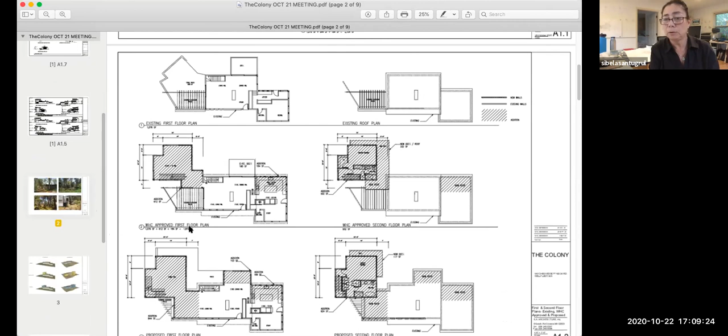From the existing house, if you could turn to sheet A1.2 showing the floor plans. I gave you, for comparison, the existing layout at the top. The middle is what the commission approved, and the bottom, called proposed, is what we're proposing right now. As you can see, in the approved plan the connection was only 36 inches wide, a pretty narrow connection. It's like a bottleneck, as Jeffrey and Mihai were saying, and they felt uncomfortable going through this very narrow space to get to the addition. That's how it all started. We also wanted to present what would be appropriate architecturally, not just in terms of ideal use, but architecture that's appropriate with the original intent of the structure.

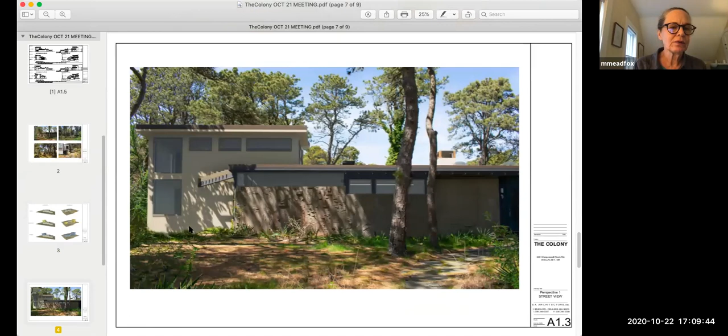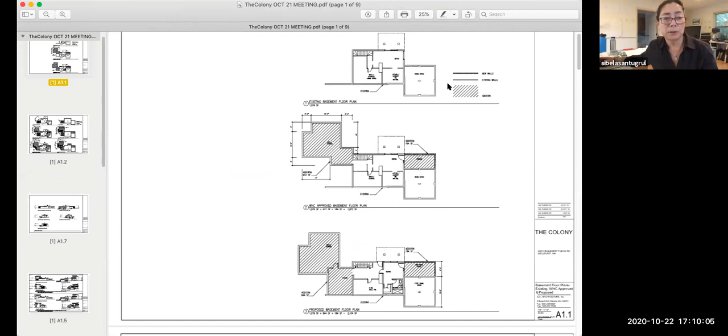Sibel, sorry, can I interrupt? We don't have what you're talking about on screen yet. Which one is it? It's A1.2. You should scroll up a little bit, please. A little more, go higher, one more above that. This is the top. Are you talking about the rendering or the plan? Go to the next sheet now. The next sheet down - this one? One more. This one. Whoops, you lost it. That's not where we're supposed to be, is it? We're supposed to be A1.2, the second sheet from the top. Yeah, that one. Exactly that one. Thank you.

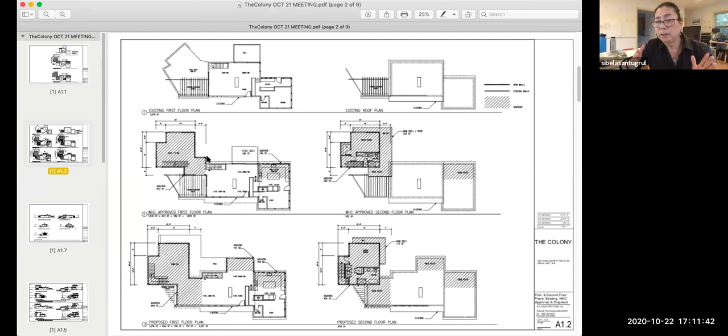In this drawing, the top shows the existing first floor plan and existing roof plan. The middle shows the Wellfleet Historic Commission approved first floor plan, roof plan, and second floor plan. The bottom is what we're asking you to review and approve now, where we took the approved plan and enlarged the renovation and addition. There's an increase in square footage of 385 square feet on the first floor, and the second floor is increased only by 122 square feet. The reason, as I said, is you can see in the approved first floor plan there's a little 3-foot, 36-inch wide connection from the old to the new, and that was the bottleneck we were trying to clean up, exactly right there.

So in looking at it, we thought that if we could take the existing patio that we were allowed in our last hearing to remove the pergola and vertical slats - that area is already within the footprint of the existing building, albeit it's a covered outdoor space - if we made that into an interior space as an extension of the existing living room, it stays within the original integrity of the design. It pushes the existing sliders out to the end of that wall with the sculpture on one side and the mural on the inside of the patio. That helps the interior layout of the living room so there's no bottleneck, because widening that 36 inches to 6 feet would make the patio an oddly narrow space. So we thought putting a roof over that sculpture wall and mural wall would actually preserve that wall, which is a major part of this structure. When you're on Chequesset Neck, that's what you really see very profoundly.

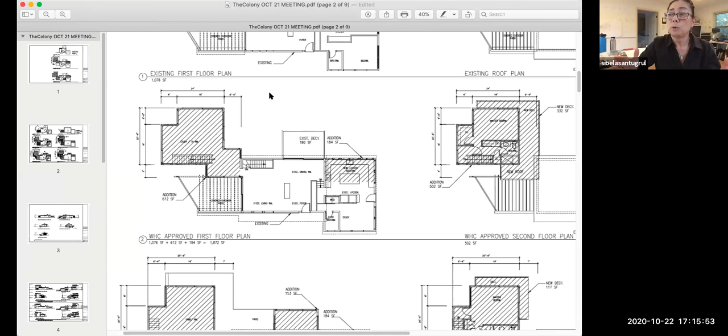Excuse me, Sibel - excuse me. Hey Lydia, can you move that up a little? I think she's going to talk about the bottom. Yeah, there - exactly, thank you.

So this part now is enclosed - the bottom left is enclosed, and the two corners. Is that 36 inches, about 3 feet, going into that addition? So the 36-inch bottleneck - now you have a good flow, and the spaces make sense. And that's all enclosed, with a roof.

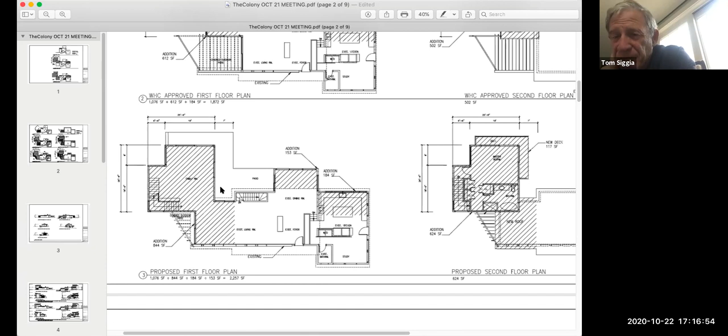So the existing roof line would come straight out at the same plane and create a roof over that patio. That's the part that we are proposing as something new to what you approved.

The second area we are looking to build out also has to do with the functioning and use of the house. On the garden side there's a balcony, a deck, that really needs to be rebuilt because one of the posts is rotting, so structurally it's unsafe. Also the guardrails are not up to code. When you do a project of this extent, the Massachusetts building code kicks in and you have to bring things up to compliance, safety especially.

So that existing deck has to be renovated anyway - it cannot remain as is. What we're proposing is that we take that existing deck, bump it out, and make it into an interior space, which would be an extension of the space currently used as a dining room.

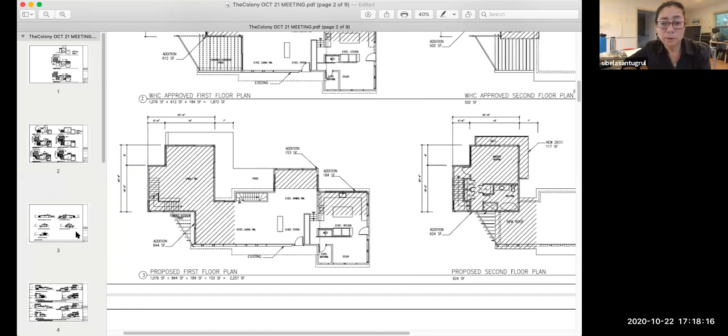If you could please scroll down further, I could show you the 3D volumetric drawings that I submitted. These are the exterior elevations and they explain the materials, etc. But in terms of understanding the three-dimensional aspect of the whole design...

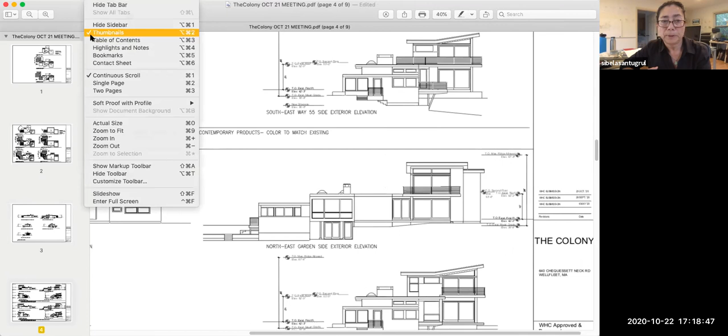Yes, go scroll all the way down, please. Okay, the colored ones right here - so these are the... okay, that's a good one, we could keep that. So this drawing - oops, too big, sorry, one moment, I'm going to change that.

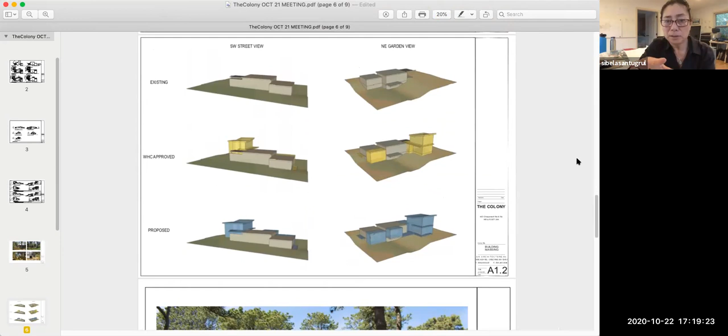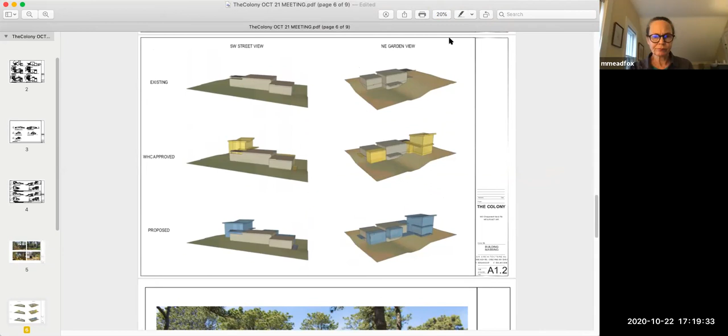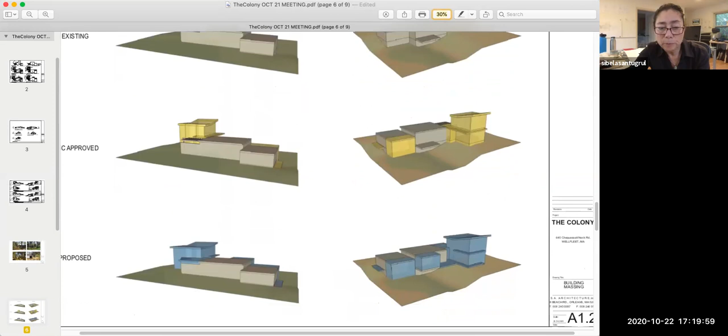Okay, so in this drawing, what we tried to show is the first two is the existing street view and the garden side. The middle part where you see the yellow volumes, those are the new additions, and that's what you approved. If you scroll down please, to the blue, what you see in the bottom part is what's proposed. So the blue area is what we're proposing now as compared to what you approved.

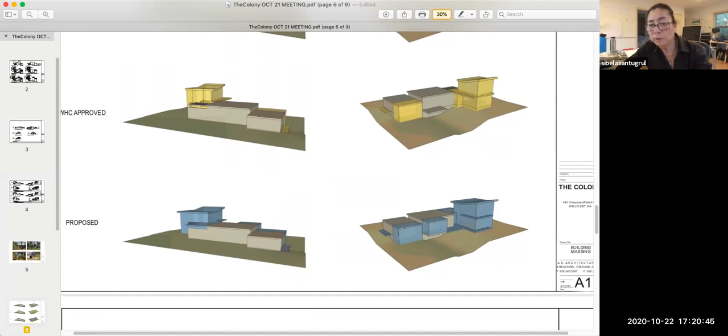So from the street side, you're really not going to see much different look as from what you approved. Other than that, you will see that the existing roof line is extending out over the existing patio, and we would still have a lot of glass so that it's all transparent and it becomes interior living room space. And then the garden view is where you see in blue what we're proposing to add on, which is right over the existing deck.

So what we were also trying to see is, does it make sense to build then a pergola? Because there is a pergola right now, although we had proposed that we would remove that and you approved that we remove it. We were thinking that if we were to build a pergola there, that would be in keeping with what is visually seen right now, where there's beautiful wisteria growing over it, and it becomes a visual connection to what it is currently. So either we could build that as a pergola, or the existing roof line could come out at the same angle and create a solid roof over that area, which also allows shadow into the living room and protects that glass.

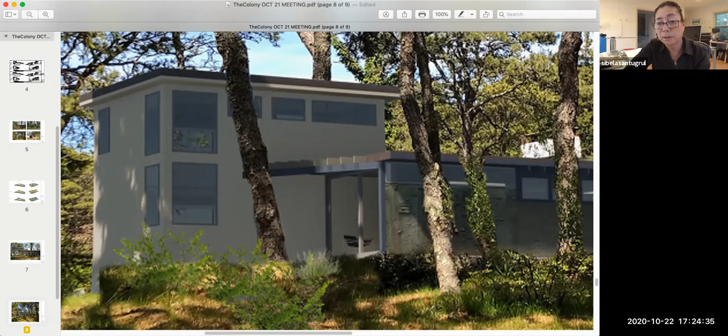So from this view, the only thing you will see different is that instead of being totally open to the air, the area where the existing patio was becomes an interior space with glass, total glass. And you see the seating inside. And the next one please, if you could scroll down.

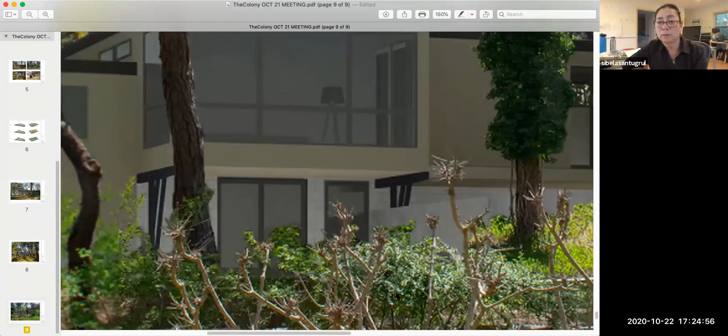Okay, so this side shows us the garden side. And the garden is a big feature of this property. And from this side, the addition that you already approved, which was the kitchen addition, is what you see on the left side. So that part is what you approved, and it hasn't changed.

In the middle is where I referenced that existing deck, where the two posts—one of them is really in bad shape and needs to be replaced. So that's the area where we took the volume, the existing deck, and made that into an interior space, part of the dining room inside. It creates an overhang over the lower floor, similar to what it does now, but instead of a deck, it's this volume that's all glassed in.

And then to the right is our two-story addition, almost the same as what you approved. So from the back, what's also nice is that between the existing building and the two-story addition, you see that glass sky, the sliders. That's the area I was referencing to before. It creates this void between the old and the new, and it also visually connects the garden to the living room space.

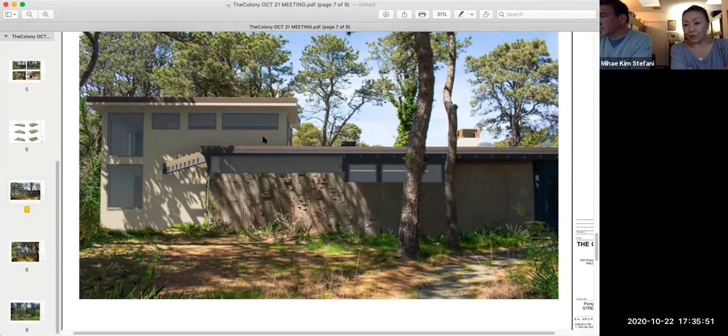However, if you look at the front of the house again, you'll see the majority of it is in the beige tone, and the only thing we have blue is the door. That is what we're trying to maintain and keep. And again, this is not the colony—this is our home, and we have to keep the colony of Wellfleet and this house completely separate. Colony is a business, an incorporation of its own, and this is our house. Thank you.

I think all the property is eligible or listed on the National Register. I beg your pardon? We are registered? I don't believe we're registered. So we're not—it's eligible for listing on the National Register, I think, as a whole part of this building and the others. It was not ever approved to be on the National Register, so right now, as we stand, it's not. I believe all the paperwork was done to make it eligible, and it was deemed eligible, but it's not on the list.

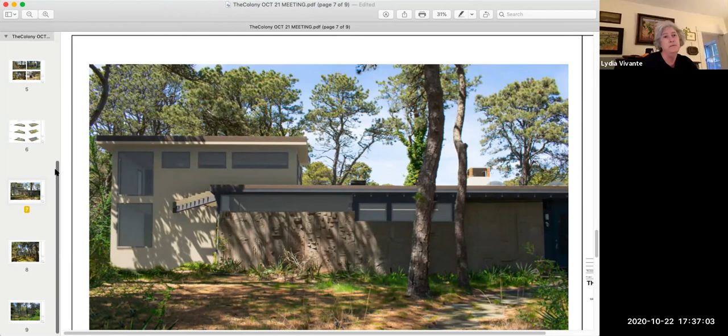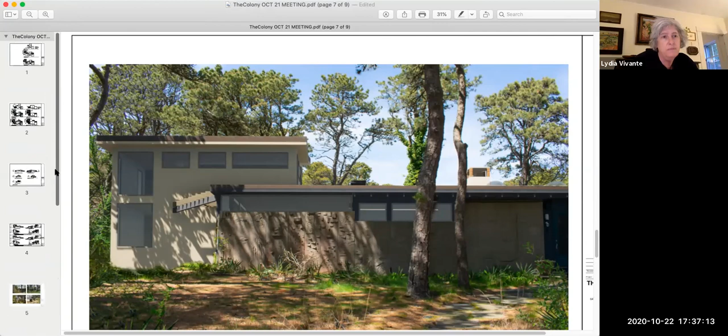And it's also, if I could remind you, this building is less than 75 years old. Our bylaw allows for buildings 75 years old and older to be deemed historic, and the Cape Cod Modern houses fall into that category. And because this is deemed eligible, that does give preservation some weight.

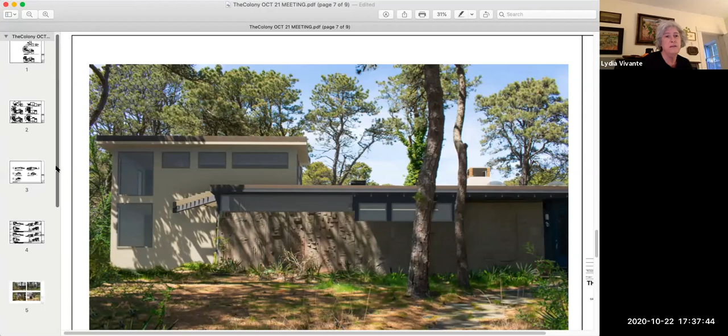The thing about the color, I feel, is something that could change down the road. I'm less concerned about the color than I am with losing some of the open space on the other side of the house. Also, if I may add, the color, as we're talking, is nothing different than what you approved before. Previously, what you approved, we didn't change—whether it's the windows, door materials, the roof materials—that's all as you approved. Yes.

I think, my theory is that this color, this kind of taupe color, is meant to mimic stone. You're breaking up a little bit—I wonder if your Wi-Fi is working as it should, because it's hard to hear you. I'm doing the best I can. I think when we speak at the same time, that tends to garble it. So what I was saying is, I think the taupe color, or this brown or beige, is meant to mimic stone, like sandstone, and that's why it's so flat. Also why they used the plywood or boards without any overlap—they wanted it to look like one continuous surface. I believe stone, but maybe you mean stucco? Yeah, stucco, I would think. Well, anyway, that's neither here nor there.

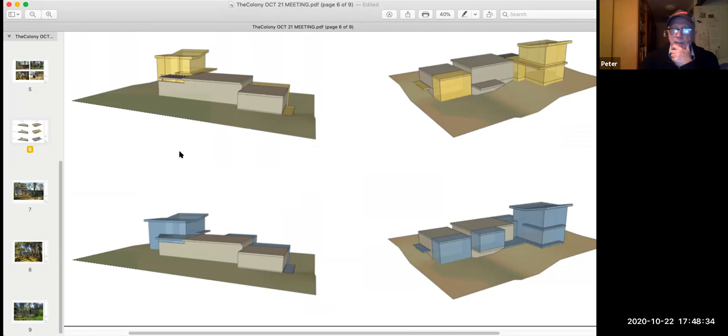I just have one comment, which is that I kind of get the alterations on the garden side, they're sort of keeping in the vocabulary of the existing building, although they're blurring the lines between old and new. I think the most aggressive thing is the enclosing of that deck, because it's breaking the plane of the building and it's sticking out.

I think you can see it in the rendering. It goes volumetrically with the new construction, but it doesn't relate. As I said previously, the whole garden side of the building has very little of the original intact, because you have the kitchen bump out on the left, the dining room bumped out, the connector piece and the addition, and even around the corner.

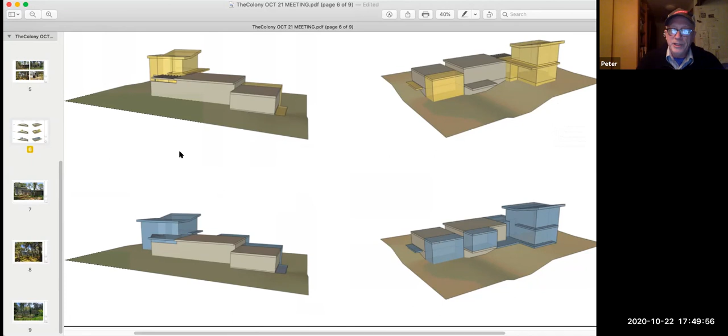But as far as the volume goes, I think that's the most radical. I think you can see it on the photograph page, the bottom left photo of the side of the existing, if you go to page 5.

Is this the photo? Page 5 of the PDF. Is this page 5, Peter? Yes, that's it, the bottom right photo.

Where the deck is, that will project all the way out to the end, it's a kind of... If I could, please — Peter, it doesn't extend all the way out to the end, actually, it's smaller by 4 feet. Oh okay, so how far does it stick out?

So wherever you see the existing, it sticks less out — it's 4 feet smaller in width. Is it 8 feet or 10 feet? Let me see, I'll give you the dimensions.

So right now, that deck sticks out 11 feet. Our proposal to build over that deck is 8 feet.

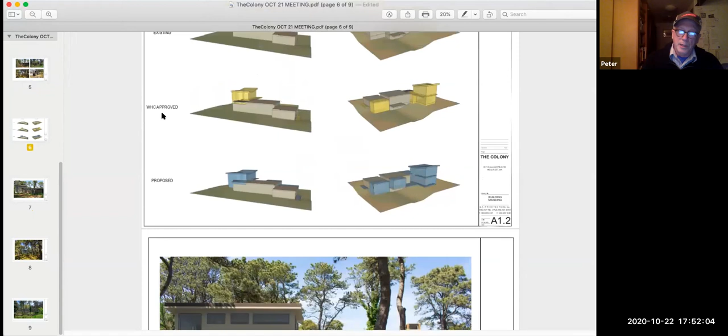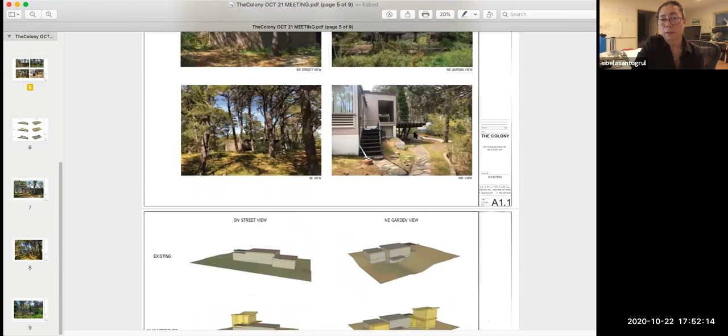Well actually, I would disagree with that — the old building is there in its form inside. Yes, we are adding out and jutting it out over the deck, but this is where the discussion could also lead: old buildings, historic buildings, we have to respect them, but also allow for changes and growth. It's just the way that it is. And as long as it's done in a respectful way, on the inside and the exterior walls, really the house is intact.

There's no part of the house that we're taking and demolishing and removing. The deck, we're going to take out because it's falling down anyway, and we're going to replace it in a different format. But the concept is still there — it's a way of really taking the old but respectfully adding to it.

Can we see the rear elevation again with the proposed new? That's already proposed and approved? That's sheet 4.

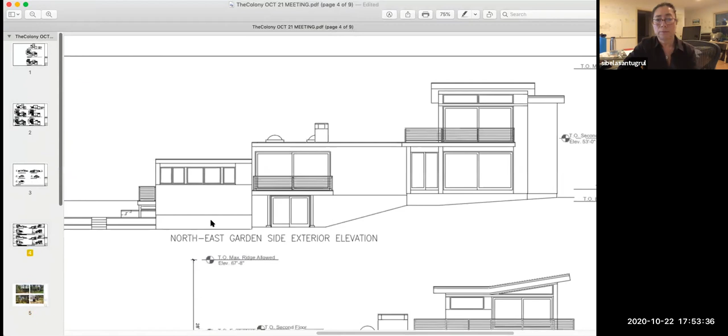But the one that was in blue and yellow, is that... Okay, this one. That makes the most visual sense to me. Okay, and that's Luke speaking.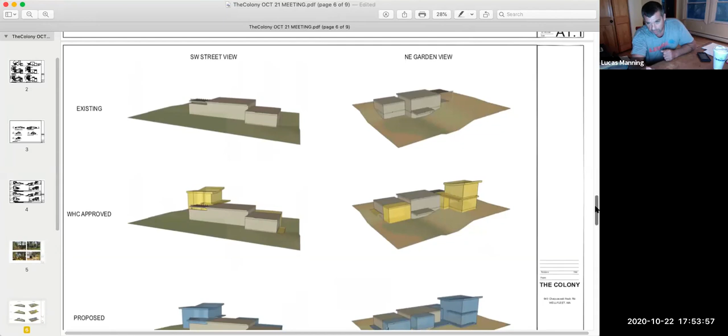I'm just thinking that what was already approved in yellow in the middle diagram, the rear elevation, almost takes away - I realize it's already approved - but to me it almost takes away some of the dimensions of the rear of the house, how it plays in and out, and you almost regain that in what's being proposed tonight with enclosing that rear deck. I realize it kind of ends up changing the whole back of the house, but I think in what we already approved, we're kind of losing some of the dimension and how it's almost one continuous wall across the back of the house, and then you almost regain some of that in what's being proposed.

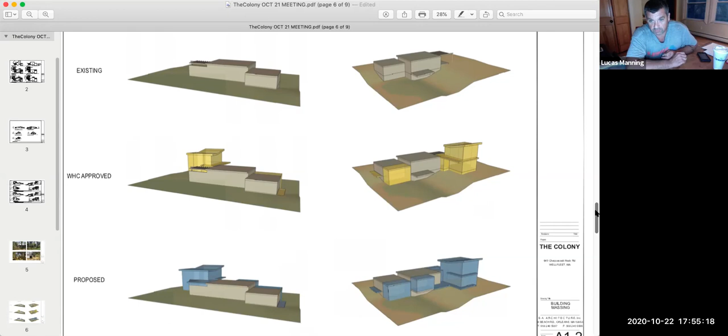I also think that we already approved what's, in my opinion, the biggest change in the overall building. I realize it's a significant piece of architecture, and I think Peter obviously has the most knowledge in regards to that style of architecture, and I'll listen to any of his recommendations. But it just seems to me that the most significant changes have already been approved from what I'm seeing, and the front of the building really remains close to the same.

This is Lydia. I feel like we could approve the enclosure of the patio with the mural, and that will be a big change, and so will the addition to the kitchen. We've already approved the addition to the kitchen and the main addition. We could approve the patio addition and hold off on this deck enclosure. It feels less intrusive, and down the road when you're living there with all the new additions, you might welcome that deck space not being enclosed - you might enjoy it more that way.

So I would try - we've already approved a whole lot with this major addition, the change to the existing kitchen area. I do appreciate that it was designed as a gallery and not as a residence, and it's great that you do plan to make this your home. But I think if you go slowly, it would be better. That's the way I feel about it.

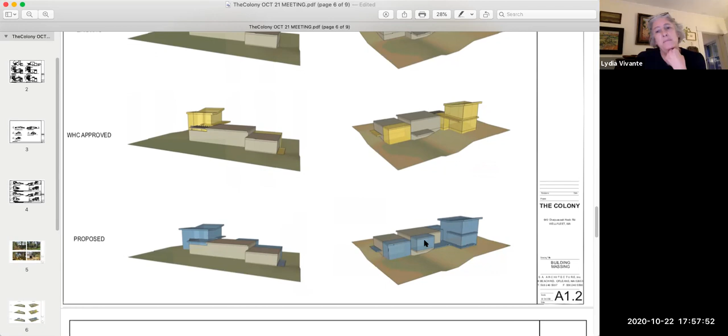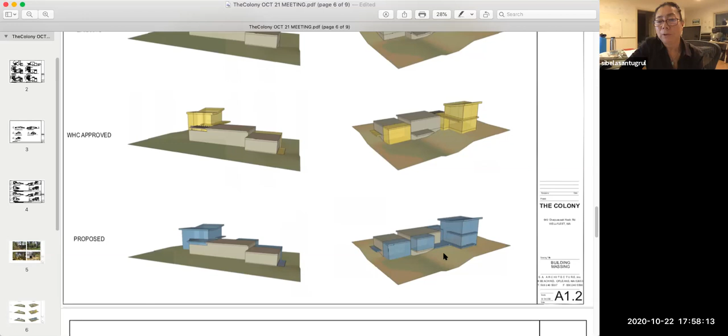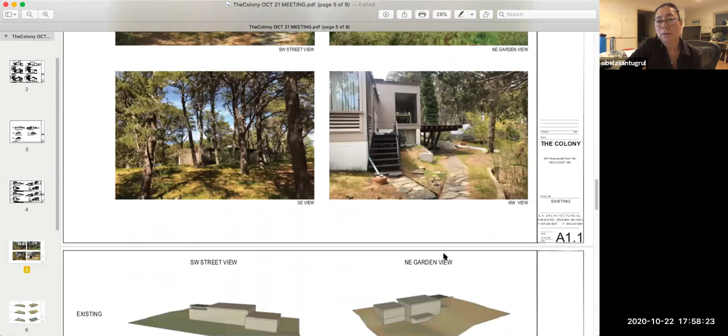Thank you. It seems to me, by having this blue drawing on the bottom, these look like they're on the same plane, the windows, and it has more of a corporate feel than a house to me. But if you go to the exterior elevations, which aren't just boxed out but show you where the windows and doors are, there's a continuation. So that would be sheet number 4, the bottom one, which is the one we're talking about now.

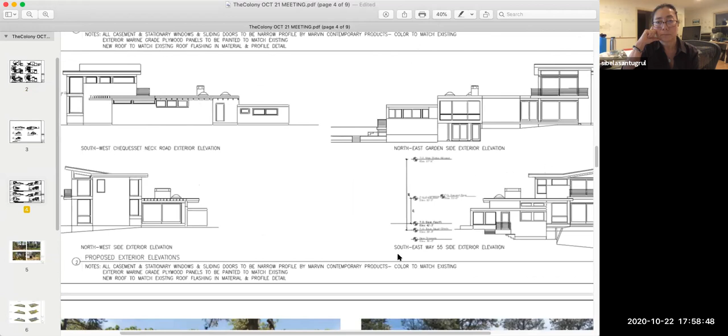Are we in the right place, Sibel? Yes, you are, exactly there. So you'll see that in terms of the horizontality of the window heads and door heads, they're in keeping with what's there right now, so there is a continuity, in other words. These are all good comments, because absolutely, when you add on and renovate and rehab an existing structure, you want to really do it right.

I guess I'm confused as I look at this compared to the other drawing where the blue and yellow were, because it did look as though there were two blue boxes extending from the kitchen area and from the dining room area, and I can't tell where those are on the lower right drawing.

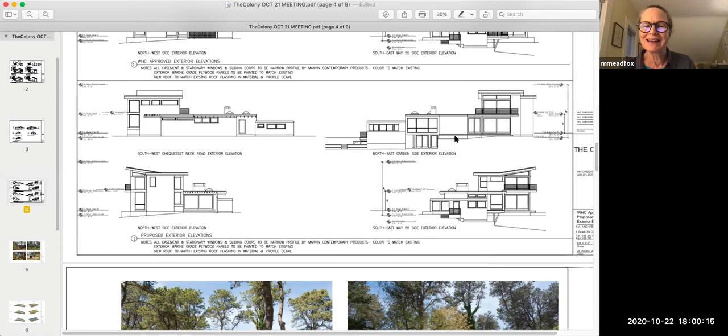Okay, so if you look at the northeast garden side exterior elevation - sorry, whoever that is. I'm so sorry, that was me. Oh, okay, you can't hear yourself. Okay thanks. So yes, I'm looking at the northeast garden side exterior elevation. Correct. There you will see that on the bottom left, that's the area that is the kitchen, and we bumped that out. Okay, so that's the one you approved previously. Right, and the area we're discussing is to the right of that, above the two posts. Oh, I see, yeah.

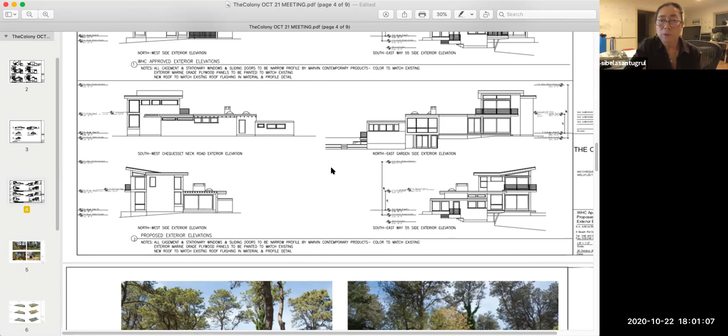Okay, and do we have a drawing of what it would look like if we didn't do that part? If you didn't do the part of the dining room, you mean?

Yes. So if you go up to the one that was approved by the commission, you'll see where the decks are, the railings. Stay on sheet number 4, the northeast garden side exterior elevation, that's what was approved. There you'll see a big slider and the railings. Those would have to be new railings put up there. Okay, thank you.

I think it's a little easier to see on the building massing drawing, with the blue and the yellow. But...

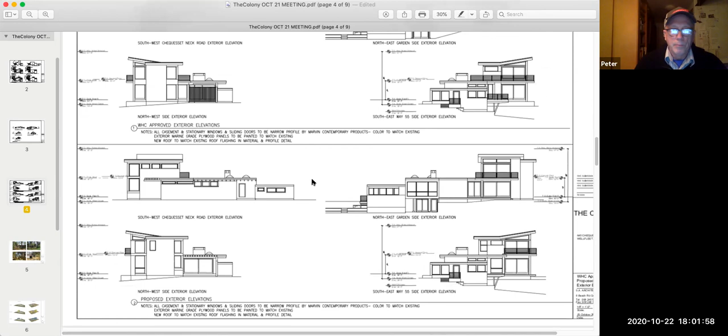So I guess, number one, I really appreciate all of the care that the three of you have put into trying to find a design that will increase your living space and honor the original building. I have two concerns. One is about that wall that has the bas-relief on one side and the mural on the other side. I wonder if it's going to become now an exterior wall of an enclosed space, how it will be possible to truly preserve it. It seems risky to have it be an exterior wall. And how are you going to deal with insulation, for example, on a wall like that that has art on both sides?

Very good question. So we have been talking to builders and we looked into that. We don't want to damage it in any way, and we don't want to remove it and replace it. So what we would have to do is build a foundation wall underneath it, very carefully. For insulation, it's concrete block right now, so we would fill the concrete block inside with insulation. Plus, as it is right now, that same wall is an interior wall, so that same concrete block wall that's outside is actually the same thing inside in the living room. So if it works there, it should work outside as well. That's where one has to really appreciate what Jeffrey and Mihai are trying to do, because this is not an inexpensive solution.

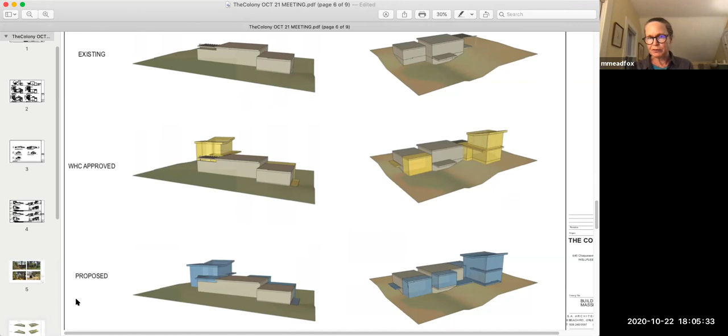I don't know how other members of the commission feel about that. I guess, Lucas, it seemed like you were okay with going with that part.

Well, I think that the more that's approved, the further away it gets from its original form. But I don't see that back deck turning into an enclosed portion of the house as taking away from the back elevation of the house, personally. But like I said, on the other hand, of course the more that's changed, the further away from the original form the house gets. But I still think the addition that's approved is the most drastic change we've talked about.

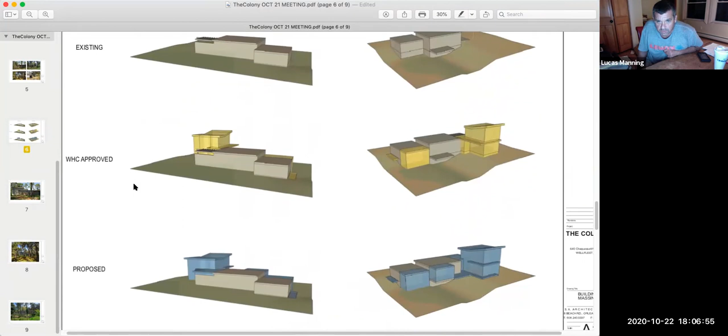I kind of missed something in between the addition and the original structure in the back. It looked like you're taking away some space from that inside corner, from what was approved in yellow—there's kind of an outside corner. Then in the bottom diagram, it almost looks like it becomes an inside corner, with less room. There's a deck that connects the two, and the addition and the proposed new deck would become part of the interior.

That may be something I missed, but it almost looks like you're taking away some interior square footage there. Yes, Lucas, you're totally right. In the approved plan, shown in yellow, I was touching the existing building by adding a bump out from its face. Whereas what we're proposing now is that I took that away and I'm bumping it in, so the corner of the existing building shows, whereas before it didn't.

In the diagram showing what we approved for the back of the house, is that one plane straight across from the left-hand side of the deck where it turns into the yellow proposed addition? Is that just a flat wall with no jog in it at all? Correct, that's the same plane just carried out. Where the existing building is, the middle portion, I pushed that out, so it's one plane across with no differentiation. So, to me, the more changes that are made, the more of the original building is altered or changed.

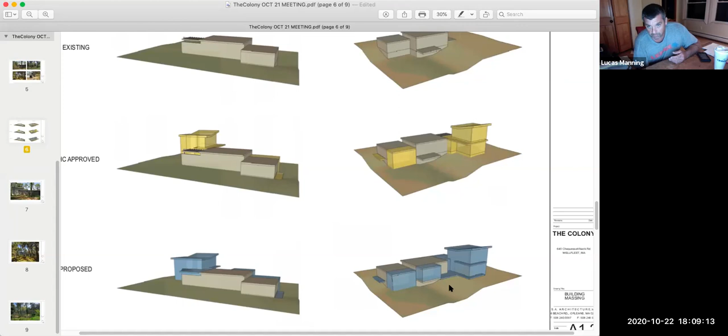Lydia, could you move it down a little bit so we can see what the original structure was like? No, the other way. Stop. Can you move it up so we can see both the top and the bottom of that frame? Yeah, a little bit more. Stop, thank you. So this is what you're referring to, the top versus the bottom?

Well, the very top, the way that the far left-hand portion of the building is jogged back towards the road, and then with what we already approved, it turns that into one flat wall, with no jog at all, it just carries right straight through. I hear what you're saying. And then in the far bottom, you kind of regain more of the same look, although more of the building's altered and you're getting further away from the original structure, you are getting closer to mimicking the look of the original structure by introducing that jog again. That's a good point.

I guess the question is, where do you stop then? If you just keep jogging, you know? I feel comfortable with approving the patio enclosure, but not comfortable with the dining room addition at this point. I am quite torn about this.

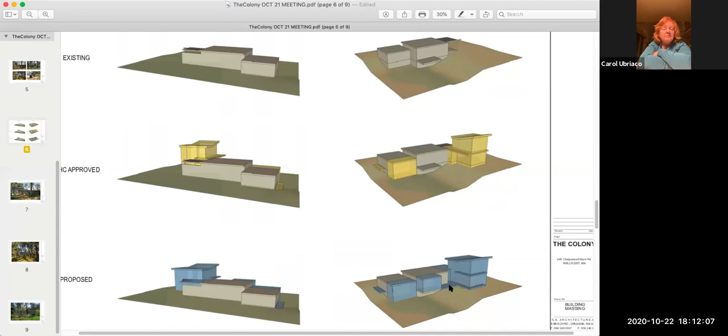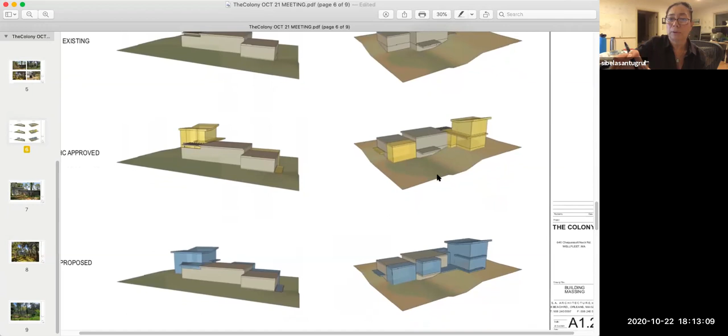If you think of the facade in the blue, you'll have glass, glass, glass, a lot of reflection. In the yellow version, it'll be quite different visually because the original facade is there, and you also get the original proportions and scale. But actually, Lydia, if I may, the glass, as you said, mimics what's there in what was approved. So that same glass is pulled out. What you see there is just massing, so you don't see the glass, but where we would propose the glass to be is the same width as it is right now on the existing plane. So the glass amount is the same, other than from the sides, you could say.

Can we move to the renderings of what it would actually look like in real life? Those were very useful, by the way, Sibel. Thank you for doing those. You're most welcome. And I have to say thank you to Jeffrey and Mihei, because these cost a lot of money and time. Thank you, Jeffrey and Mihei, because you are very helpful, extremely helpful.

Can I make one comment?

Of course. I guess, yes, I totally agree, it's so much easier to understand with the renderings especially, and the volumetric massing drawings. This is a really good precedent for a presentation for a project like this, because it's very clear, and it's a great way to understand what's on the table.

One thing about the dining that bothers me is that it's a cantilevered box that doesn't have a base under it, which seems like a break with the vocabulary. It seems to go with the addition, but it's a real break from the existing building, which is slightly shifting boxes that are on the ground. This is an upper level volume sticking out with nothing under it. I understand the comment about reintroducing the stepping of the back facade, but it's very different than the two-story stepping — it seems like kind of an intrusion out into the, I guess, break with the vocabulary of the existing building.

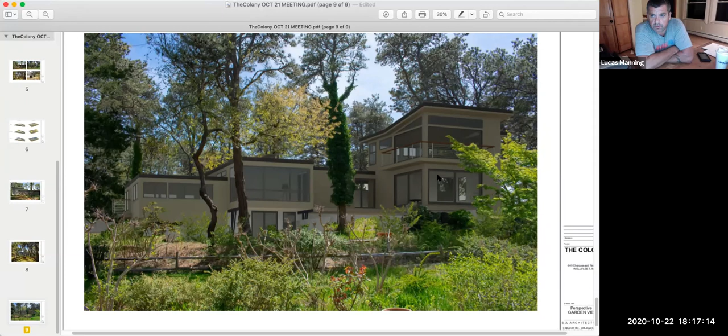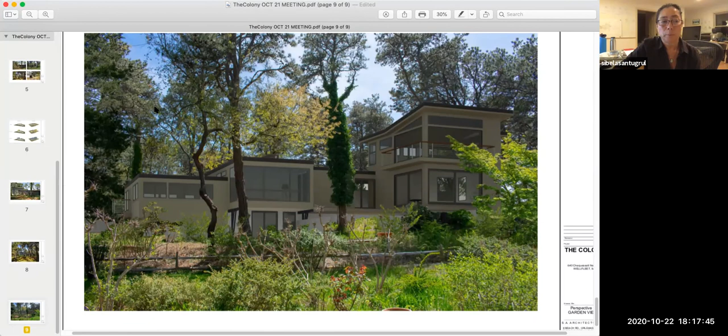I'm sorry — the deck that's existing now, and failing, is it truly cantilevered? There's no posts? No, there's two posts — one of them has a diagonal. I don't know if there's a close-up, but what you see right there, where you're pointing to right now, right there, black — it's like that, but set farther in from the corners, not as spanned out. I think also it appears here, you can see it — those are the posts.

Just wondering — if you go to the existing photos, I believe it shows there. Which number? Oh, you have it, right there, at the bottom right. So if you rebuilt the deck without extending the dining room, it actually looks like the joists are running in the opposite direction, so it's not really cantilevered at all — it's structured on posts and footings of some sort. Correct, correct. Well, so about half of it is cantilevered.

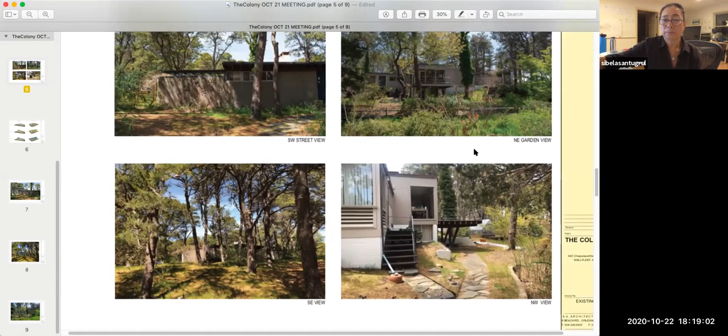Now I was just wondering, because if it's failing and it was going to be cantilevered, that would mean you'd be basically replacing the whole floor system anyway to some degree to get two-thirds of a span inside the room. Correct, you're absolutely correct. The other idea we had looked into, and then didn't go in that direction, was an 8-foot wide bump out in the dining room, and the remaining 3 to 4 feet we could do a deck so that from the garden side you still see horizontal railings and a deck as it is now with the bump out. We could also perhaps do a 6-foot bump out with a larger, 5-foot deck with the railing, so it would look similar to what's there, but with that play of volumes and planes going in and out.

I'm feeling more like Carol now in terms of mixed feelings, because I agree with Lucas about honoring the ins and outs of the back side. And then I'm also concerned about how much we're losing of the original building. It's a tough decision. I am very torn.

Because I must say, Sibel, I like your design. I think it's a really interesting, attractive design. And the challenge is honoring the work we're supposed to be doing in the Historical Commission and honoring the needs of this family to have the kind of building they want to live in, while respecting certain aspects of what the building has been.

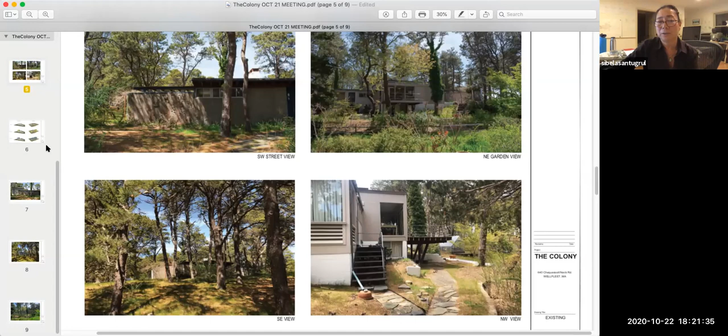Does it make any difference to us if it's 6 feet or 8 feet? I'm talking to the others on the commission. I'm not sure.

Luke, are you there? I'm here. Am I unmuted? I think so. Okay, you are unmuted. Would 6 feet make a significant difference rather than 8 feet here? You mean for the bump out of the building itself? Building, right - Sibel just offered 6 rather than 8.

The existing deck is more like 8 or more, isn't it? It's 11 feet right now. The 6 or 8 feet to me doesn't seem like it would make that huge of a difference, really. Okay, that's kind of what I was thinking too, but I'm not an expert in this.

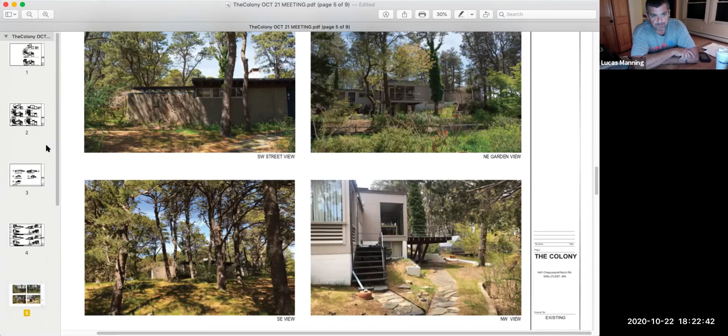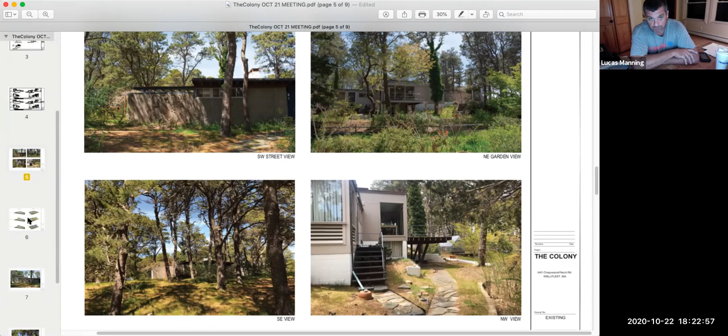When you look at the diagram showing just the mass of the existing building, I think it almost looks like a ranch on a hillside with a cantilever deck there. But obviously it's a significant piece of architecture. What I'm getting at is, if you just look at the mass with no detail, it's very different than when you take into consideration all the little things that make it what it is - the heavy copper drip edge and some of the louvered details under the windows. It's really in the details that set it apart from being ordinary. So I think a lot of honoring the building would be in preserving a lot of those details, even if it was in a new part of the house.

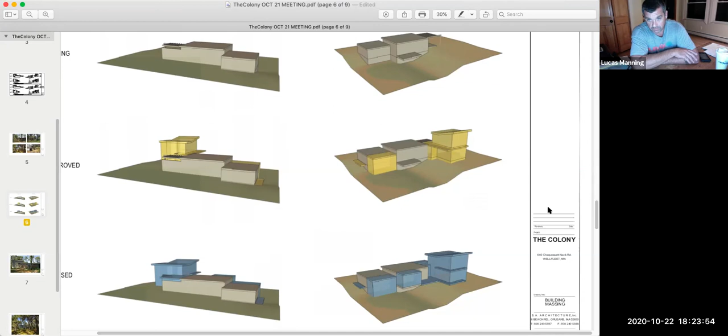Okay, you're totally right with that. I am in total agreement. Yep, I agree as well, yeah. The devil's in the details - the windows and all that.

Now, if I may ask, would you all prefer that we also add a deck outside of that bump out to the dining room? I personally don't need the deck there. I don't know if it would make it look more bulky and unbalanced, like too much hanging over. I'm not sure. Yeah, I worry about that too, Carol.

I think it would just go too far if the deck was bigger. I don't think that's really the point of what we're trying to say here. It's more about trying to preserve as much of the original building as possible, and the scale of it and angles of it and things like that - that's what we're fighting about. I don't think it's the size of the deck at all.

This is a little beside the point, but I'm just aware, in our lifestyle here in Wellfleet, how nice it is to eat meals outside. There's a part of me that feels it would really benefit you to keep that deck close to the kitchen and dining room, so you could spend all your time out there. We spend all of our time on our porch in the summer. Yeah, so do we - we eat all of our meals outdoors and it's absolutely wonderful.

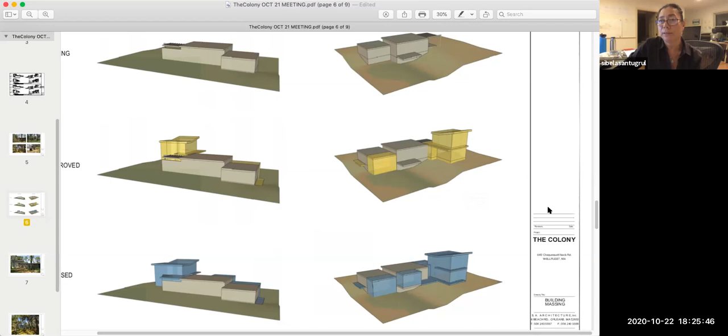Oh, may I just butt in a little bit? Because I think what we got a little lost is that if you look at the bump out of the dining room and the bump out of the new living room, between the space right there, there's a gray space.

Actually, it's just what we have right now, so we're going to try to use that as our outdoor space. We love to eat outside in the summer as well, so that's where we're thinking, because then we can still enjoy our beautiful garden. We can use that outdoor space, going out from the dining room to outside. So definitely we will enjoy our outdoor space here.

Good, so glad you'll have a place to do that. Thank you. Me too. We love it, we really, really do, being outdoor here. It's a gorgeous garden.

Okay, so Tom, did you want to say anything about this? I kind of agree with Luke and Carol. I've got to leave it up to the experts on this one. This is a very difficult decision.

So if we're saying we're going to leave it up to the experts, it seems like both Sarah and Peter were saying that they had concerns about the dining room bump out. I don't know if Sarah's still with us, but Peter, would you say that's a correct assessment? Yeah, I hate to be the fly in the ointment, but that is my opinion, yeah.

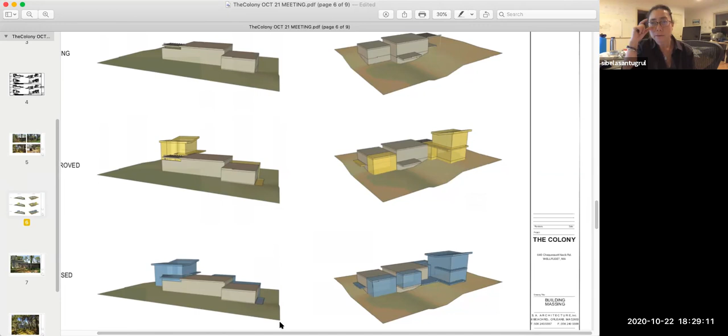I don't know if Mihae or Jeffrey has anything to say at this point. Thanks, Sibel. Not being in the same room, it's kind of difficult to get any input from my clients, in other words, and perhaps they could speak for themselves.

Thank you. We very much appreciate the deliberations that we've heard this evening. We understand, as well as you do, arguably more so, how difficult these decisions are in terms of establishing a balance between what to preserve and how to adapt this structure to a lifestyle and to our needs. And so yes, there's absolutely trade-offs that we have to make. We understand the argument about the visual diversity of the garden side of the house. We considered that as well.

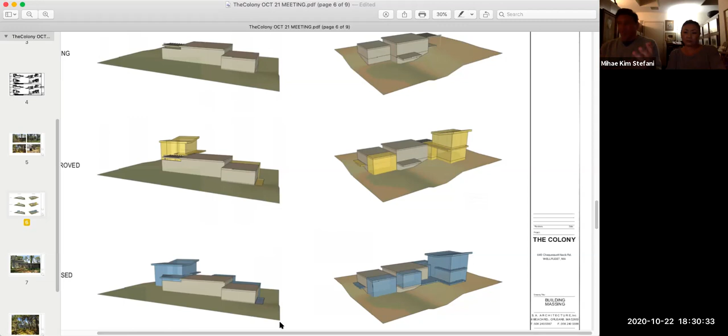That's why we talked to Sibel about whether or not to have a small balcony outside of the proposed dining area, because currently when you walk in the front door, you take 3 steps and you're on top of the dining table. So we were hoping to have a little more space there. But you know, if that's the part that you believe is really critical to maintaining what Peter called the architectural vocabulary, then so be it.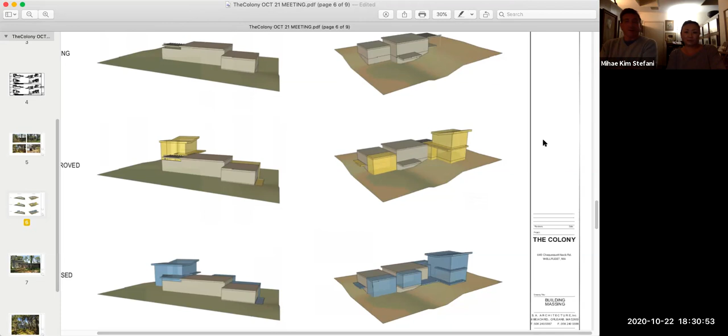Anyway, thank you all for your work on this and the time and all you've put into it. We appreciate it. Thank you very much.

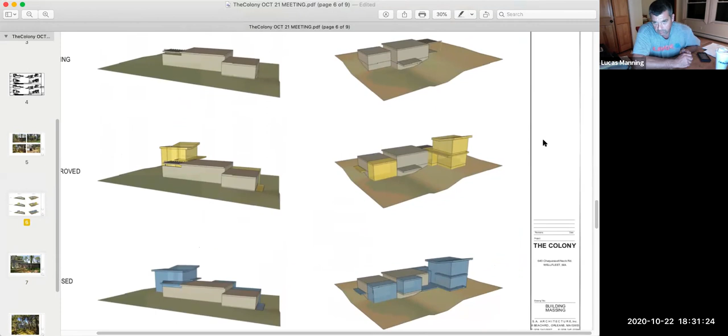I think what Sarah suggested makes sense, to try to maintain the back portion of the house, the original back portion as is, and maybe be open to, if they're willing to put more work in, and if they'd like to see a change in what was already approved, to change the addition rather than the existing structure.

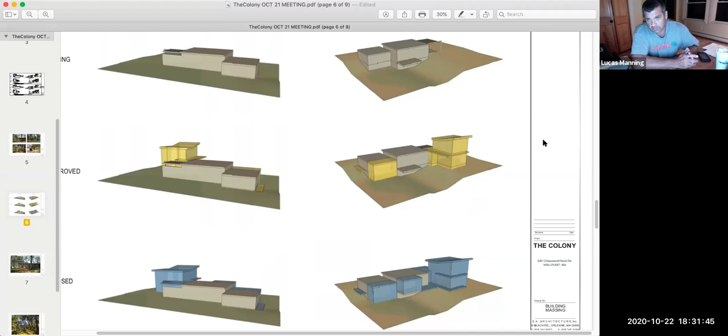And so I wonder if the motion might be something like moving to... I'm not even sure how to put this, but to add to the original aspects that we approved, the back addition where there will be a roof over the mural. That was not well put. Anybody want to work on the wording there? The mural's in the front of the house. Yeah, in the front. I'm just looking at this diagram.

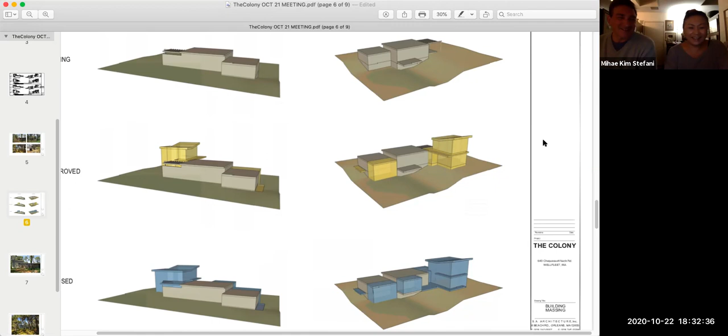Could I suggest: move to approve the patio enclosure? To approve the patio enclosure in the front, as presented. This is Sarah, may I make just a quick comment? I just want to point out that the proposal shown in blue on your plans, it does make other changes to the 2-story addition above and beyond enclosing that patio area.

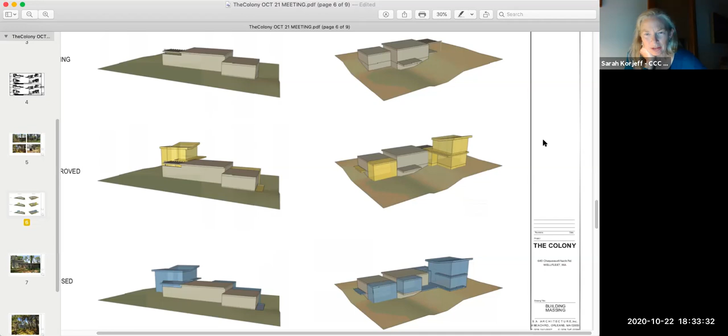So I think any motion you make, you would probably want to consider the entirety of what's shown in blue, and perhaps it would be easiest to just approve that plan minus the enclosure of the rear balcony. That is an excellent suggestion. Yeah, that makes sense to me.

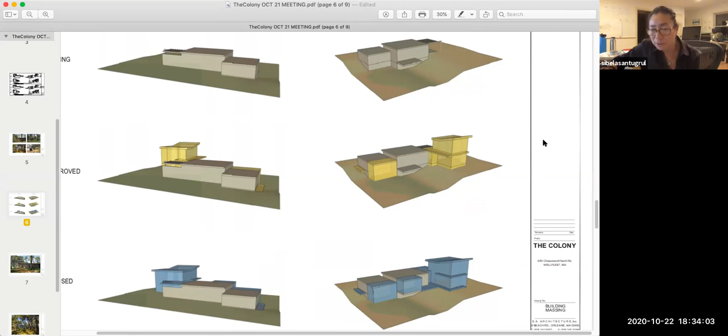How do we name this? So move to approve, what should we call that design, Sibel, that's on the bottom in blue? The new proposed - can you refer to the date of the proposal? Sure, so it's the date on the plans, as dated. Let me see, what was the date on those plans? 20th of October, 2020. 10/20/20. Okay, so I move to approve the 10/20/20 proposal as presented,

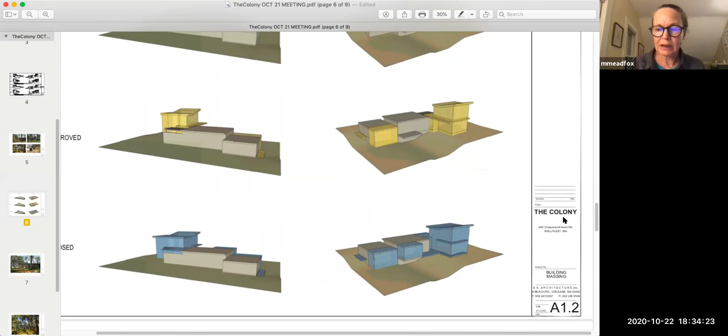with the exception of the addition to the dining room. Does anybody want to make any modifications to that proposal? Nope. Okay, it sounds good.

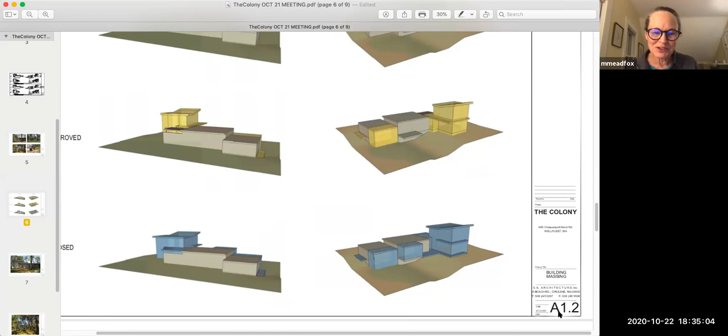Did you get that, Carol? As secretary? Okay. Does anybody want to second that motion? I'll second that. Okay, and since we're not looking at each other right now, we're looking at slides, we'll have to do this verbally. You can stop the sharing.

There we are. Okay, so I, Meryl, vote aye. I, Carol, vote aye. Lydia, aye. Luke, Tom, aye. Aye. Oh sorry, Tom, sorry Luke. So that's unanimous.

Thank you all very much. We appreciate all of the care and patience and understanding that went into this. And Jeffrey and Mihai, Lydia and I appreciate your talking to us this afternoon about the house and the design. That was very helpful. Thank you. Thank you for your time, everybody. Thank you, good night. Appreciate the work, and thank you to our consultants. Really appreciate both of you being here, Sarah and Peter. Sure, pleasure. You're very welcome. Thank you.

Okay, so we have Ryan Valelli, I don't know, not familiar with Ryan. But Ryan, do you - oh we should unmute him. Ryan, do you want to say anything about what brings you here? Oh he's still muted, can he - how do we do this? Can you unmute? Oh I can do it I think. He may not want to be unmuted, I don't know. I keep pressing it but it doesn't seem to be doing much. Okay, oh there we - oh no no.